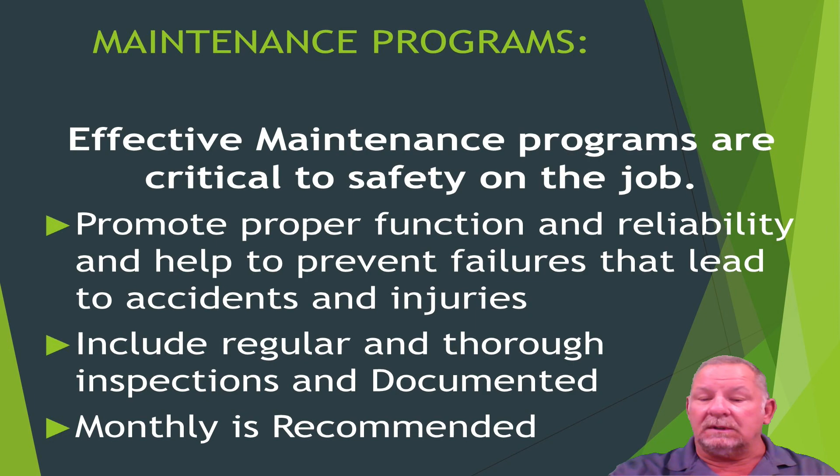A lot of the times I hear guys talk about, well, why should I turn this in, a piece of equipment or truck or tire or something like that's not in good shape? Why should I turn it in? Management doesn't do anything about it. If you document it, it's going to get taken care of. It's the responsibility of management and supervisors to take care of things like that. And it doesn't fall through the cracks if you have good documentation of it. So I encourage y'all to document your inspections, whether you find anything at fault or whether you don't. Document both the good and the bad of your inspections.

Again, maintenance programs include documentation of what you found. It also addresses the problems immediately and documents what's been corrected. If you've had a tool or a piece of equipment that has a defective part on it and you've documented it, it's up to supervisors to document what's been taken care of to control or replace the bad part of it. It's a good idea to have a written policy and a written plan in place, both for inspections and for correcting the defective equipment. If you've got a written plan in place, everybody's on the same page, and it does get taken care of more effectively.

This is right out of the APPA manual. Most of you in this business follow the APPA safety manual, and it states all tools and equipment, regardless of ownership, shall be of approved type and maintained in good condition. Tools are subject to inspection at any time. Supervisors have the authority and the responsibility to condemn unserviceable tools regardless of ownership.

Guys, what that means is if you signed the book of that APPA safety manual, that you received it, you are signing that you read it and you understand it. You need to know that this is required of you to inspect and keep all of your tools and equipment in good working condition.

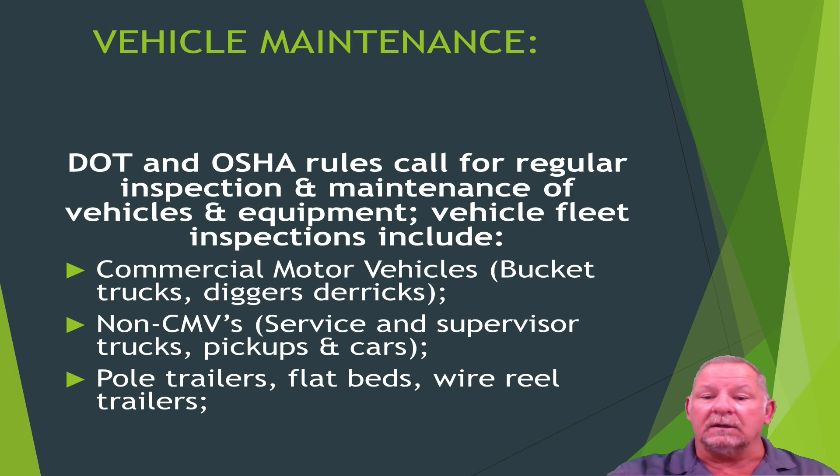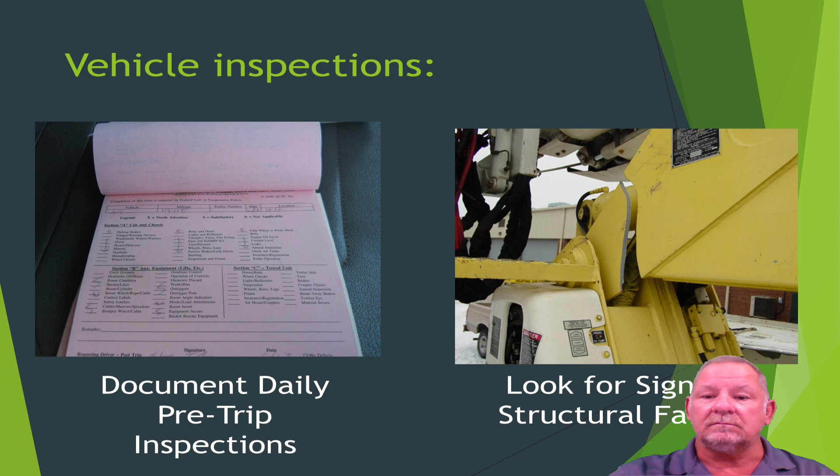If we just sit in the driver's seat and check the box on these things and don't actually look at the different components, something like that could be out on the job site and could obviously cause a pretty serious accident. Non-commercial vehicle trailers and miscellaneous trailers have to be inspected before each use. I mentioned that earlier. A lot of times these trailers and things don't get used every day. It could have been a week or 2 weeks or several weeks since it's been used. It is critical that you do a visual inspection before each use of all of these type of things.

Miscellaneous powered vehicles and things like that should also be inspected. I think it's important to actually inspect every vehicle, whether it's a commercial vehicle or not, before each use. It's just taking pride in your work and pride in your craft. So I think it's a good idea to do all that.

Cables and winch lines need to be inspected before each use, whether it's on a digger truck, whether it's a material handler, whatever it is. If you're going to use that winch line or that cable, it needs to be inspected before you use it. So let off enough cable to do a good inspection of it before you go to pick up a transformer or anything else, or a pole or whatever it might be.

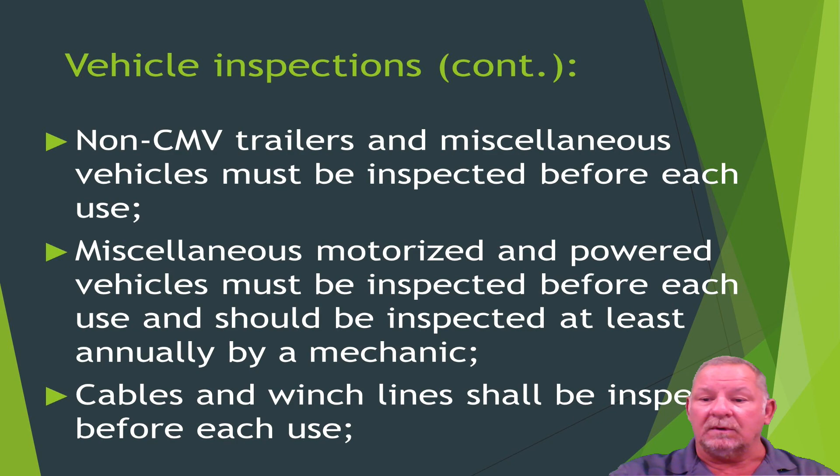So we can make a guess that yes, it'll pick up that transformer or whatever it is you're picking up, but it's simply a guess, and it's not worth your life or the life of one of your crew members that could be underneath that thing when it lets go. So please don't do things like that.

It's not okay to say, well, we'll just tie this knot in it and we'll get it fixed tomorrow. It's not okay to do that. If you have something like that, get it fixed, get it taken care of, and please don't use it until it does get taken care of.

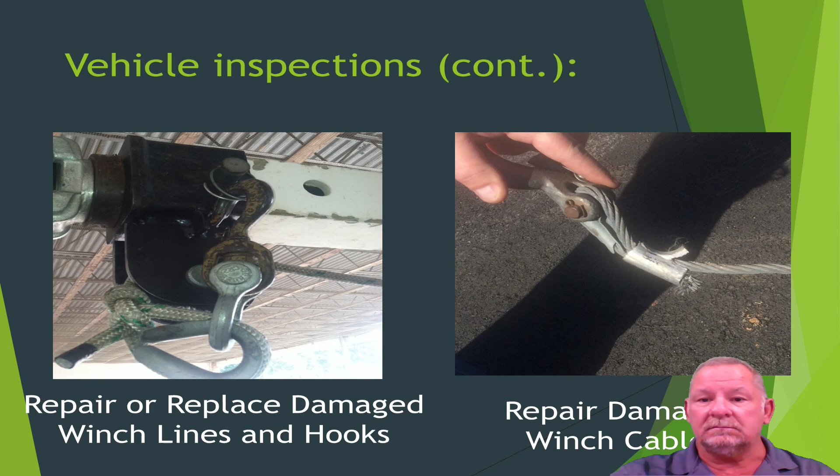Power tools. Power tools can cause major problems. If y'all remember back here a few years ago, there was an incident with a battery operated tool that caught on fire and caught a bucket on fire. Things like that can happen. So it doesn't matter what type of tool it is, whether it's a hydraulic type tool, whether it's a battery operated tool, whatever, you are required to inspect them before each use, and you are required to make sure that you maintain them properly.

A lot of times when we get tools, they may be very similar to a tool that it's replaced. It may be a new tool that we've never had before. The only way we know what the manufacturer recommends for adjustments and settings on them is to read the manual. We need to make sure with our tools we read the manuals and we know what those recommendations are from the manufacturer for the adjustments and settings on them, and we need to keep those adjustments and settings correct. It's very important that we know what's expected of the tools that we use, and in most cases we need to read the manual and understand what the manufacturer says.

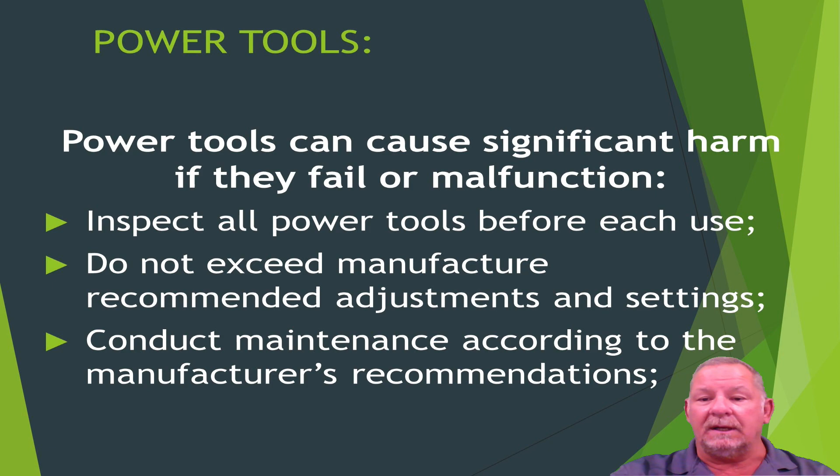Some of these hydraulic hoses operate under extreme pressure, and you get just a small pinhole in one of those and it can cut right through you. So make sure that you do maintain your hoses on a regular basis. If they need replaced, get them replaced.

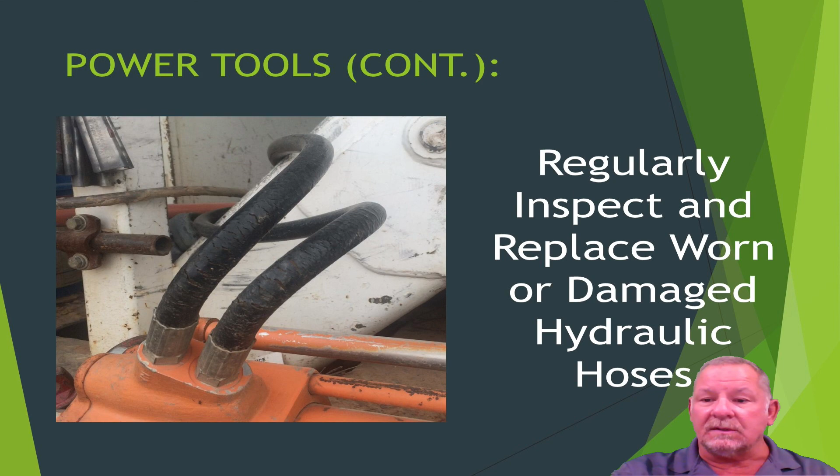Hard hats. A lot of places have a regularly scheduled replacement for their hard hats. I know the co-op that I worked at, we had a replacement of our hard hats every 3 years. It was just what we did to make sure everybody's hard hat stayed in good condition and wasn't going to fail under impact or anything like that. If you have a regularly scheduled replacement on your hard hats, make sure that nothing falls through the cracks. If somebody's gone the day that you replace them, make sure when they get back that they do get their hard hat replaced.

That's not to say that you can't replace it in between times. If you inspect that hard hat and it's taken a couple blows or something's happened to it and it's got a crack in it or a deformity in it, get it replaced that day. Don't let things like that slip through the cracks. We can put hard hats on and think nothing's going to happen, and nothing's going to fall on our head, or we're going to be okay, or we'll just be careful that day. And that's the wrong attitude to have.

So if you've got a regularly scheduled program to change things like that out, follow through with it. If you've got a damaged hard hat just from normal wear and tear or from something that happened to it, get it replaced immediately.

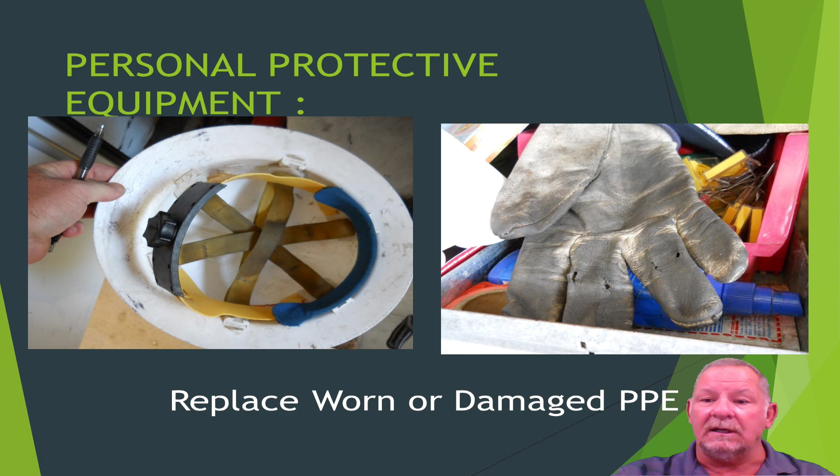Rubber glove protectors. You are responsible to keep those in good condition. If they need replaced, get them replaced. That protects the rubber glove that protects you each and every day. It's important to make sure that they don't get in situations like this where holes have worn into them and have possibly got into the rubber glove itself. Keep those rubber protectors in good condition. Keep them changed out when you think they're necessary, and make sure that they're going to protect the glove that's protecting you.

Personal protective equipment. Replace worn, damaged, or deteriorated harnesses, lanyards in fall arrest systems, whether it's lanyards and harnesses for your bucket, whether it's climbing gear, whatever it is. A lot of places, again, have scheduled replacement programs in place. If you do not have one and you think your harness is worn or damaged to the point where it needs replaced, take it to your supervisor, let them look at it, and let them determine whether you need a new one and need to have it replaced.

I don't know a utility around that won't replace one that needs replaced. Don't be afraid to take it to your supervisor and have them look at it. And if you do have a regularly scheduled replacement program for harnesses and lanyards and things like that, make sure that, again, everybody gets it, whether they're there that day or whether they come back in the next day.

Your personal protective grounds. You are required to inspect them before each use. As a user, you are required to inspect those before each use, okay? So the thing with personal grounds, we need to go a little bit further than just inspecting them. When you pull a set of grounds out that you're going to ground a line on to protect you while you're working on that line, you need to do more than just look at it and inspect it and say, yeah, it looks clean, it looks like it's in good condition. Guys, I highly encourage you each time before you put a set of grounds on, take the time to brush the jaws, clean those jaws up.

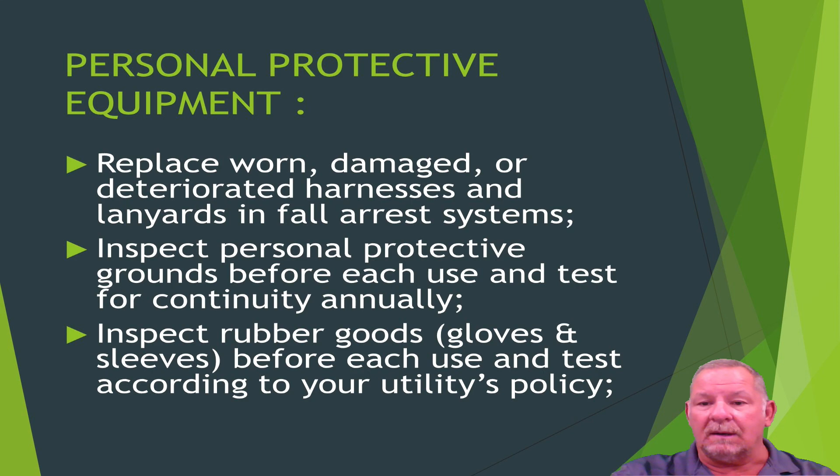Make sure you give them a good inspection, not just visually, but give them that air test and take the time to do it before each use. It's vital, guys. It's vital. We're counting on those things to work for us and to keep us safe. Please do a good job of inspecting your rubber gloves and sleeves.

Live line tools. Talk a little bit about live line tools here. You are required to inspect all live line tools visually before each use. That means your shotgun sticks, your extendo sticks, whatever type of hotline tools that you're going to be using. Here's the thing. How do we go about keeping those clean? Well, I think it's really important on rainy days when you're standing around in the warehouse looking for something to do, to take the time, pull out those live line tools, pull out the cover-up that you use, and take the time during those days to clean them. Keep them clean as often as you can.

We're counting on that stuff to work for us. We're counting on it to keep us protected while we're working on hot phases, and it is very, very important to keep them clean, keep them inspected before each use, and keep them changed out should something need to be tested.

All of our cover-up and things like that, as well as our live line tools, are inspected annually by usually an outside source. That is up to your company to get that done. But make sure that you look at the tag on it, make sure that it is within that inspection time, and make sure that it doesn't fail any visual or mechanical inspection. Run that shotgun stick a couple times before you plan on lifting that hot phase or lifting that hot jumper. Make sure you inspect it good, make sure everything's working properly before you get a hold of that hot jumper. It's important to do that.

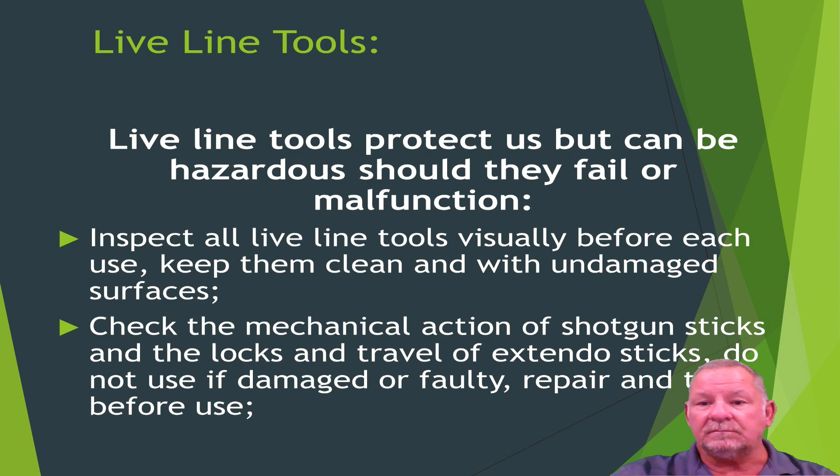Hand tools. Hand tools are something that sometimes we take for granted and we think can't hurt us. You are required to inspect all of your hand tools before each use, make sure that they're working correctly, make sure that the handles and the grips are in good condition, make sure that if you're counting on those things to work properly for what you're going to use them for, that it's working. Take the time to inspect them before each use, just like you do everything else that you use.

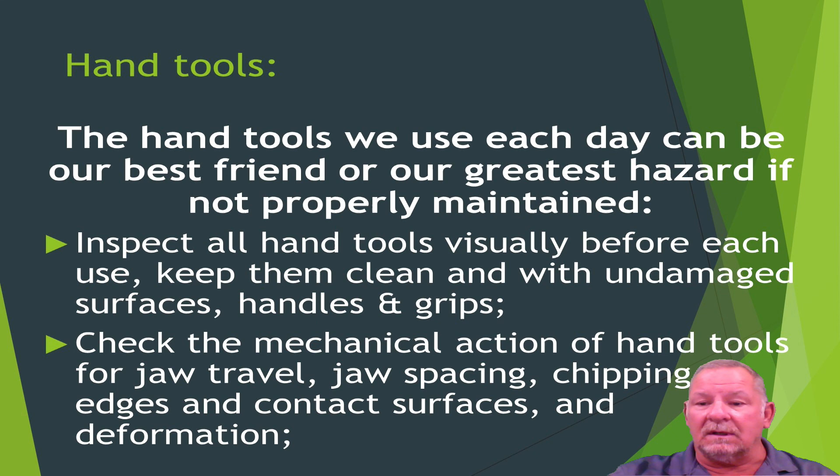Don't take your hand tools, your simple tools that you carry every day, for granted. Okay, make sure they're working good, make sure that they're in good condition, and make sure that they haven't had anything happen to them since the last time that you used them.

This is out of the APPA safety manual. Ownership, whether it's the employees that own the tools or the company that owns the tools, it's up to the company to ensure that all tools are in safe and working condition and in good operational order. So what that tells you is the company has the right to take away any tools that they don't feel are in good working condition or that need to have maintenance or be replaced. It's up to your company to do that, regardless if it's your tools that you purchased yourself or whether it's tools that the company purchased for you. Okay?

Reliability is up to the user. The user has to inspect all tools before each use and report anything that's defective. And again, I'm going to stress on reporting as documentation. If you've got anything that's defective, document it. Document it, turn it into your supervisor, and it's more likely to get taken care of quickly, and it's more likely to get taken care of, period.

Because a lot of times I hear, well, if I turn something into somebody, nothing happens. Well, a lot of things can slip through the cracks because of how busy things are for supervisors and managers. If you make a document of it and document the hazard or the defective tool, it will get replaced.

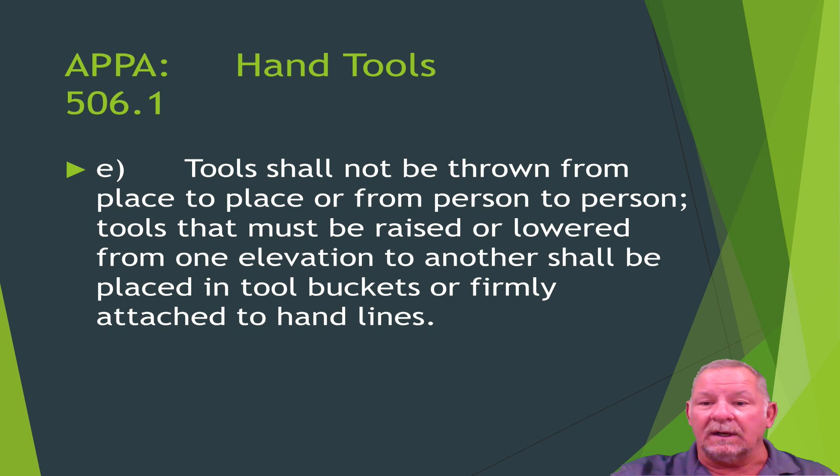Use hand lines. Hand lines is one of those things that we've gotten away from taking with us and using properly anyway, and I think we need to get back to the basics of that. We need to carry hand lines with us if we're working in an elevated situation so that tools and equipment can be raised and lowered to us properly.

Again, do not use hand tools if they're damaged or faulty. Get them repaired or replaced before you use them. If it's your responsibility to buy that tool, it's up to you. It's part of your trade. Go get it, go buy it, go replace it, take care of it. If it's up to the company, document it, turn it into the supervisor and let them replace it.

Never use hand tools for other than their intended use. We talked about that one before. Please be diligent with that. Take pride in your craft and take pride in how you work, and make sure you set a good example for everybody. Store all hand tools properly and do not store them where they can damage other PPE.

A big pet peeve of probably about every supervisor in the state is people carrying things like Kleins, crescent wrenches, screwdrivers in their rubber glove bag. Guys, that's not acceptable. Don't do that. Don't store them in the trucks where they're up against something that they could damage. If it's got a sharp blade on it or something like that, it's required to be covered. So make sure that you're diligent with storage of your tools. Take pride in your PPE and make sure that you don't do things that could damage it over time.

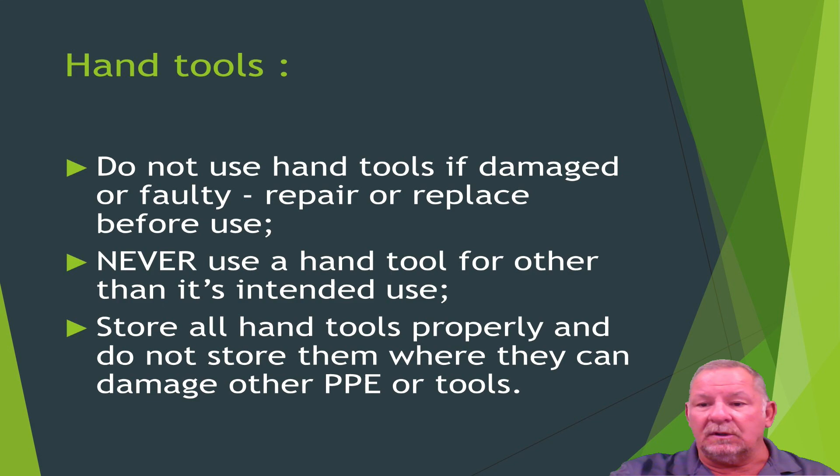Be diligent, guys. Take a little bit of pride in what you do. Wear those rubber gloves all the time that you're in a situation like that, and don't depend on a tool that gets inspected electrically once a year to protect you.

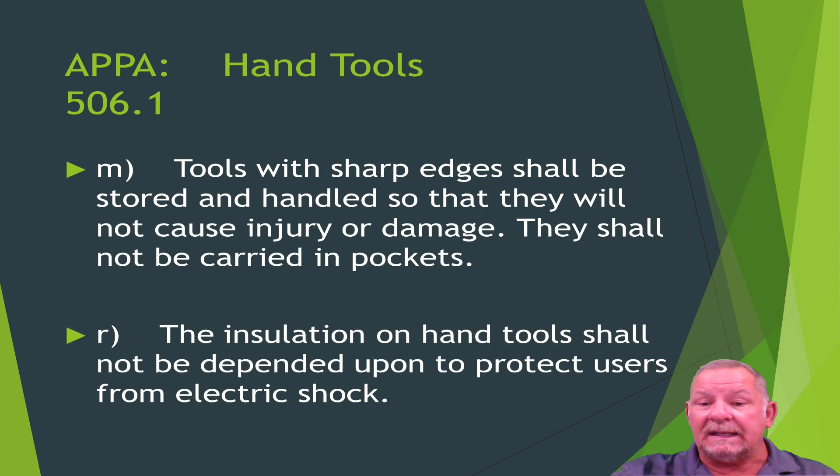Your winch lines, whether it's on a material handler, a digger derrick, or a front end winch, no matter what kind of winch line it is, we recommend that monthly you pull the entire length of that winch line out and inspect the entire length of it. If you see any type of fraying or damage at all to that winch line, it needs to be replaced. It needs to be fixed, guys.

Even if that's frayed back there 30 or 40 feet, it's not okay to use that winch line if it's been damaged anywhere on that entire spool. I think it's a good idea to at least monthly pull the entire length of that cable out and inspect the entire length of it. And you are required to inspect it before each use, okay?

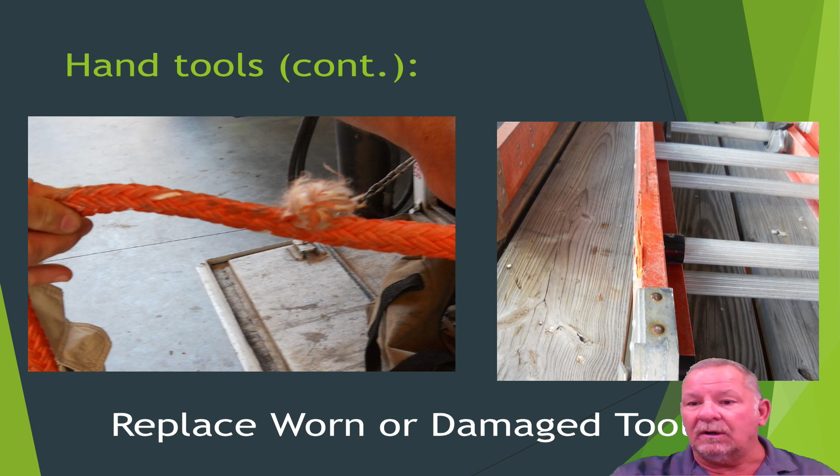Things like ladders and other tools, if they have a crack or something in it that could make it fail, don't take the attitude that, well, it'll hold me this time, I'll get it fixed tomorrow. Don't get on a ladder or use a tool that has any type of defect in it at all and think that you're going to get by that time. You may and you may not, and you don't know when your number is going to be called.

So if you've got a defective tool, a defective ladder, anything like that, don't think that it'll be okay to use this one time and then replace it tomorrow. Red tag it out of service, have them bring you another one, have another crew bring you a ladder, whatever it takes to do it correctly and do it safely.

I think it's a good idea to get it off the truck as soon as possible when you get in at the end of the day. Set it in an area that it won't be used and that everybody can see the tag that you tagged it out of service. Report it to your supervisor and let them handle it from there.

But don't think that it's okay to use a tool just once, and don't forget to tag it out of service. It is your responsibility to do that. If you find a defect in something, it's your responsibility. Tag it out of service. Let the supervisor handle it from there. They'll either replace it, repair it, or whatever they deem necessary.

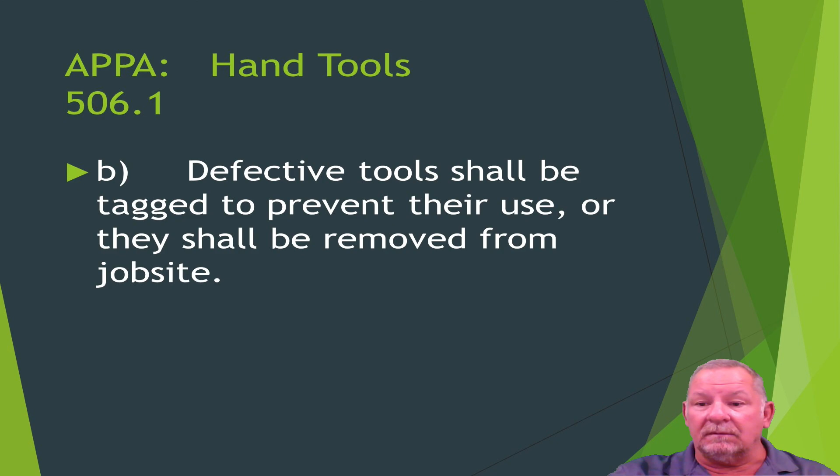And make sure you don't pencil whip it, guys. Don't sit in that seat and pencil whip an inspection form. Actually look at each component before you make that check mark in the box.

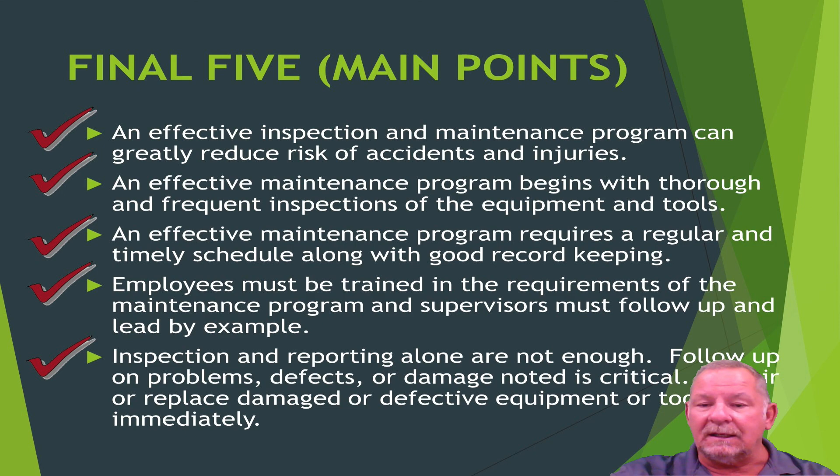But document it, make sure it gets taken care of immediately. Don't be that guy that thinks, well, I'll get by with it just one more time and I'll turn it in tomorrow. If it's got a defect in it, get it taken care of immediately, guys. It's just what we have to do.

Any questions or comments, take the time at the end of this program to discuss it with your supervisors, discuss it with your safety personnel, whoever you need to. If you don't understand what your policy is at your utility, ask. Find out. Take the time at the end of this program to discuss it. Take the time to discuss any concerns that you have on tools or equipment that maybe you think hasn't been taken care of, and see where your supervisor's at with it.

I think it's vital that we take care of these problems accordingly, and that we do our due diligence when it comes to taking care of the equipment and the tools that we use. I hope you all have got something out of this program.